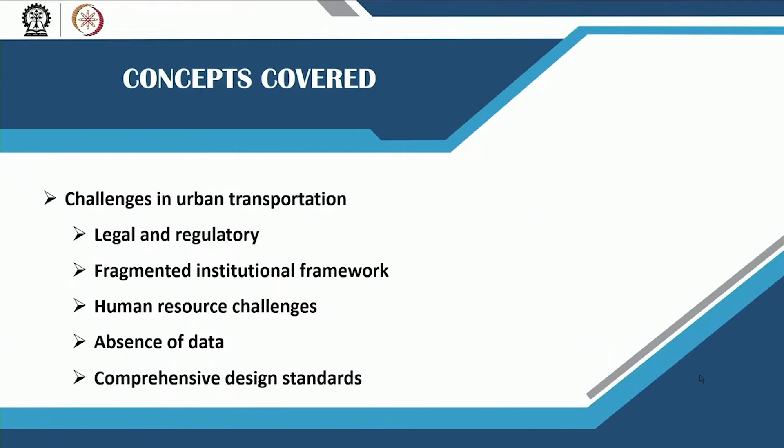So far we have introduced you to urban transportation networks, the urbanization in general, how vehicles have increased, how motorization rates have increased, and we have looked at certain specific issues in urban transport. In this lecture, we will continue looking at some challenges in the urban transportation system: legal and regulatory challenges, different institutional frameworks within which urban transport has to operate, the labor force or human resource challenges in public transportation, the lack of integrated data in urban transportation systems, and also comprehensive design standards or the lack of it.

When we look at the regulatory structure of urban transportation systems, we see that there is no central legislation that comprehensively addresses the urban transport requirements of Indian cities. There are multiple different legislations that govern different types of transportation systems, but there is not one that comprehensively stitches everything together into one coherent document. Often a transportation system operates along a road or corridor which crosses several jurisdictional boundaries, so you are left to deal with different types of regulations across different boundaries, making it even more difficult to comply with them.

For example, if a national highway crosses two state boundaries, there may be less stringent regulations in one state, while the truck entering the next state faces more stringent regulations. So the truck operator has to keep in mind these various regulations while transporting different goods. This is some of the regulatory challenges that a transportation system poses to various companies.

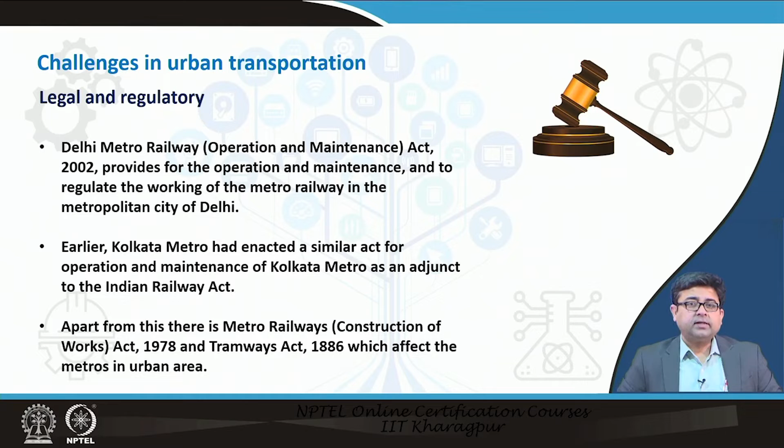But these are again only laws that govern metro rail. The laws that govern the construction of roads or highways are different. So when dealing with construction of a metro railway, you have to comply with the local regulations of highways or roads in that city, whereas operations and maintenance can be carried out as per this act. You see the multiplicity of not only the acts, but the jurisdictions and different players involved in managing these transportation systems, which makes this a very complex phenomenon.

The requirements of other modes of mass rapid transit such as BRT, LRT, monorails do not have any legislation to support them. Currently, if you were to implement a monorail - I believe in India only Mumbai has the monorail system - there are no specific regulations in place that govern its operations or construction. These are all special cases of implementation of these modes, and if you implement it in a different city, you would create a special case there as well. So there is a need for umbrella legislation so that many of these things can be coordinated well.

But when it comes to transportation and other aspects such as land use or environment, that becomes a whole other issue. If transportation impacts the environment, should the transportation agency comply only with transportation-related regulations, or do they also have to comply with overall environmental regulations, only a part of which deals with transport? So you see, when transport is such an infrastructure system that cuts across different geographies, different disciplines, and different administrative jurisdictions, framing regulations for this is a challenge which has to be overcome over the years.

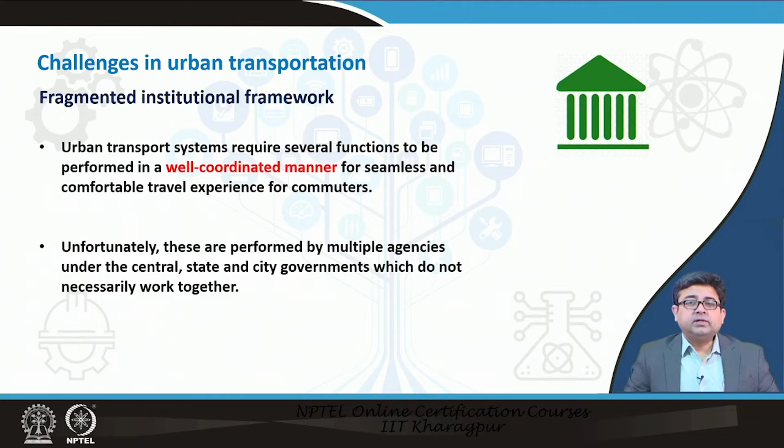The other thing is fragmented institutional framework. There are always multiple agencies at different levels that frame these laws or have jurisdiction over transport agencies. For example, transport is usually considered a state subject, but in certain jurisdictions it also becomes a local subject. So when there are different local laws and different state laws, it becomes difficult to comply with these, and enforcement also becomes difficult. There is a need to develop these legislations in a well coordinated manner.

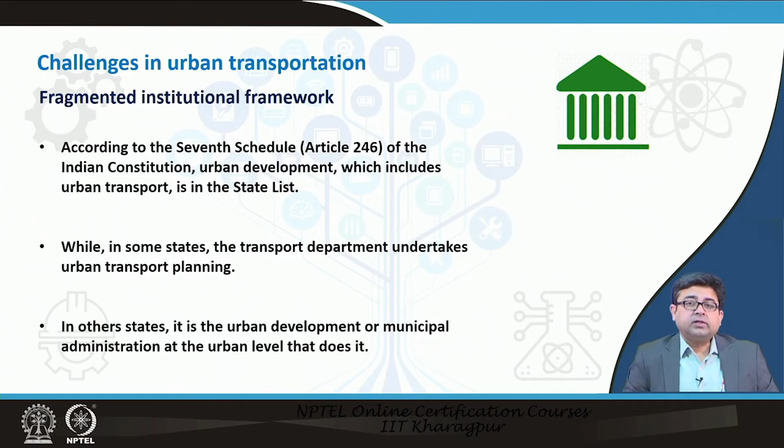According to the 7th schedule of the Indian Constitution, urban development, which includes urban transport, is on the state list. In some states, the transportation department undertakes urban transportation planning, while in other states, urban development or municipal administration at the urban level does it. So when a municipality is implementing something and a state is implementing the same thing in other cases, it becomes a challenge to oversee these things and to implement consistent regulation throughout the system. That is one of the challenges.

Also, there is an absence of any effective coordinating agency where urban transport and land use can be integrated. This is always a challenge, not only in India, but also worldwide. Land use and urban transportation go hand in hand. So when we say that, what we mean is that if the use on any particular piece of land changes, its impact on the transportation network also changes.

For example, if you have land on which you currently have a single story independent house, the number of trips or vehicles generated from that house is significantly different from if you convert that land into something where you build a multi-storied apartment complex. Both are residential, so you are not changing any zoning, but you are changing the land use, and with this change, the apartment complex may have multiple families living in it, each with multiple vehicles. So the number of vehicles coming out of the same parcel of land will change, and that will differently impact the transportation network. This is what we mean when we say there is a strong relationship between land use and transportation.

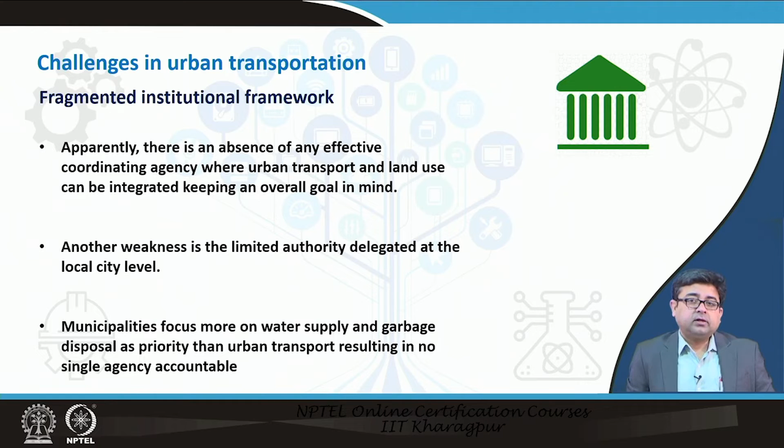Now, when we talk about the institutional framework, land use may not be governed by any transportation legislation, laws, or regulations, and so there is always a miscommunication between these two agencies as to how to well coordinate between the two. Only a few urban areas around the world have come around to solving this problem, and most of us are otherwise grappling with this issue.

Next comes the human resource challenge. Transportation as a field for employment has always been there. Many people are employed, especially when a new highway, new railroad, or new airport is built. So it does generate a lot of employment, but what happens is these are one-time jobs. You cannot use the same labor force who built a particular airport in one city to then take it all the way across the country to build another airport in a different state or city. You usually don't do it. So what happens is the skill set that local people develop can only be used once or twice.

Highways are a more popular source of generating income or livelihood, because you may expand the highway and your local knowledge always helps you generate a lot of jobs.

But when it comes to urban transportation, other than the construction of highways or structures related to the transport network, other human resources are in a very nascent stage of development currently. For example, how do you build an efficient metro rail system?

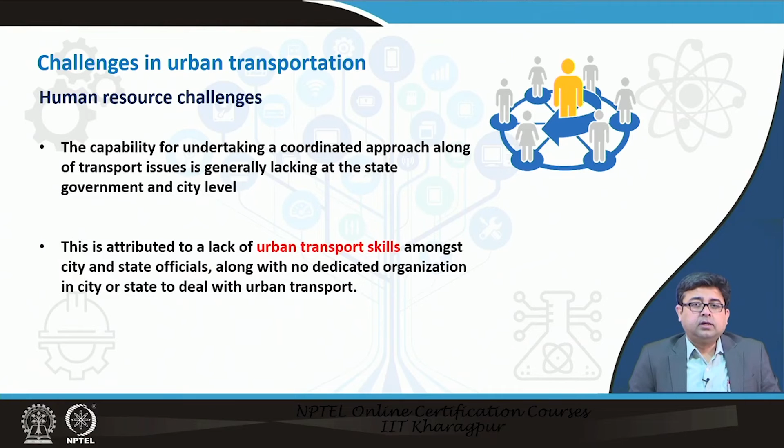Most of the state and city level agencies have suffered from overstaffing of untrained, unskilled manpower. So when you look at some of the older institutions in transportation, such as the Public Works Department and so on, you would see that they employ a large number of people.

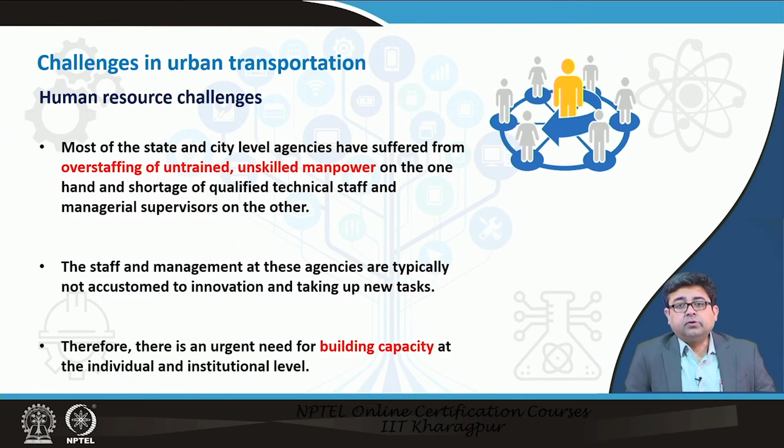However, their skills have not been redeveloped or polished over the years. So they are still using older technologies, not keeping pace with the new technologies that are available, which in turn affects the quality of work being conducted. So that kind of lag, or lack of skill development and reskilling, can be noticed in some of these older agencies.

The next challenge in the transportation sector is data. What you can infer is that there is data available, but it is in silos, and it is not available very easily in digitized format, especially in the case of India. So although the slide says absence of data, you are to interpret that as absence of coordinated, easily available digitized data.

If I were to want to access the data of a different city, it would be very difficult for me, sitting in another city, to access that data easily via the internet or something else. Of course, the data would be made available to me if I went through the proper channel, wrote certain application letters, and moved certain files, and I am sure we would obtain the data within a month or so, but there is a lag in getting that data.

Then the quality of data is the next thing. If it takes a lot of time just to get hold of the data, you have to make sure whether you are receiving the right type of data, and what is the quality of that data. Is there a lot of noise within the data? Is the data clean? Are the parameters you are looking for available in that data? Is the data very recent, or is it very old? All of these issues are there with transportation related work.

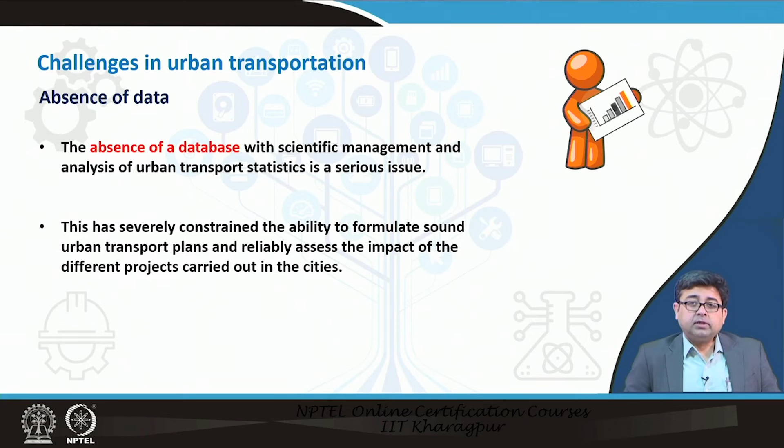However, with the advent of big data sources, there are newer regulations being formed which are enabling different agencies to get real time data and use it for effective governance, so that the operations of urban transportation systems improve. So overall, you could say that there is data that is available, but what lacks is the timely availability of quality data that is digitized and coordinated.

Like we said, reliability and accuracy of the data has a lot to be improved upon, along with availability of data from one agency to the other. So one agency might be doing a great job keeping up with all its data elements, but the adjoining agency or administrative unit may not have any data.

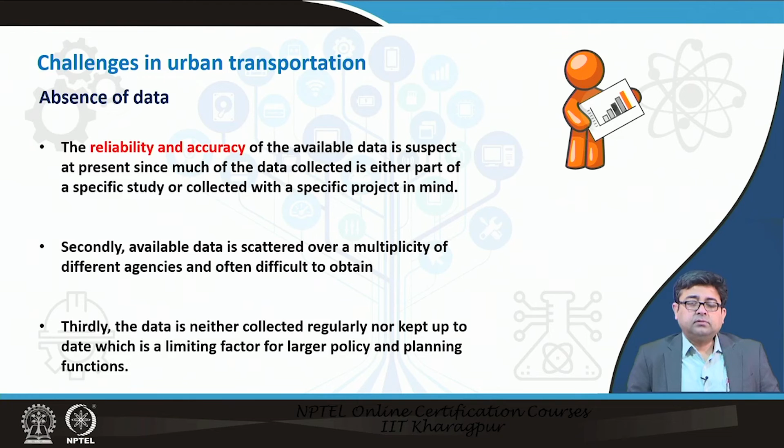So when you are looking for data at a corridor level or a regional level, you would only have data for certain segments maybe, and not for the entire segment. That does not help much in understanding or developing efficient policies for improving the operations of the transportation system.

The National Urban Transport Policy, formed in 2006, identified the Institute of Urban Transport India to be developed as a national institute to build a database repository. So there are steps being taken. Now you have a digital database where many agencies are putting up their data, and it is easily downloadable. These efforts are helping researchers and analysts to data crunch, number crunch, and bring out solutions to these problems.

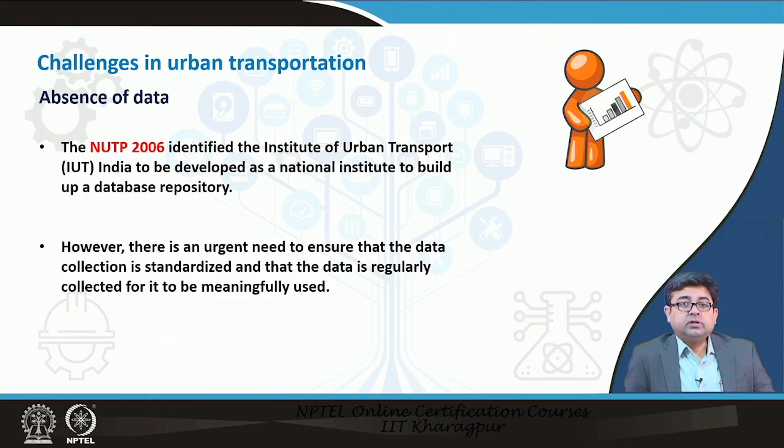You should also be aware of certain data uses being thought of in India, such as urban observatories, which are implemented at a city level scale. Some cities, for example, have cameras at all their intersections. These cameras generate huge amounts of data, and there is a central control room where people are monitoring all intersections and crunching this data to understand real time traffic conditions. They can predict that if an accident has happened downstream, what its impact will be on the upstream traffic. So if you have continuous real time data coming from live camera feeds, you can always convert that into real time information. The data needs are always growing.

Lastly, there is a challenge when it comes to comprehensive design standards. IRC codes are available for different types of design, setting out design guidelines and technical standards for construction of roads and bridges. However, a critical feature is that IRC codes are not adhered to for urban road development. They are not mandatory for municipalities. So you have these regulations, these codes, but they are not made mandatory.

When they are not made mandatory, people usually bypass the standards in the name of cost saving, and often construct substandard roads or substandard bridges or structures, which is never desirable. IRC has been developed over the years and has nearly been perfected in many cases for the design of roads and bridges.

However, new age transportation systems such as metro rails, BRTs, or bicycle paths and tracks do not have design standards. So you would question why a system is not working. We have to remember that due to the lack of standardized designs, the system may have been bound to fail. Are we developing systems just by looking at international standards and trying to build them here? Many times such systems may not work if they do not have indigenous standards catering to local conditions. So there is a need to develop comprehensive design standards for new age transportation systems, and also a need to implement such standards or make them enforceable so that local municipalities or states follow them.

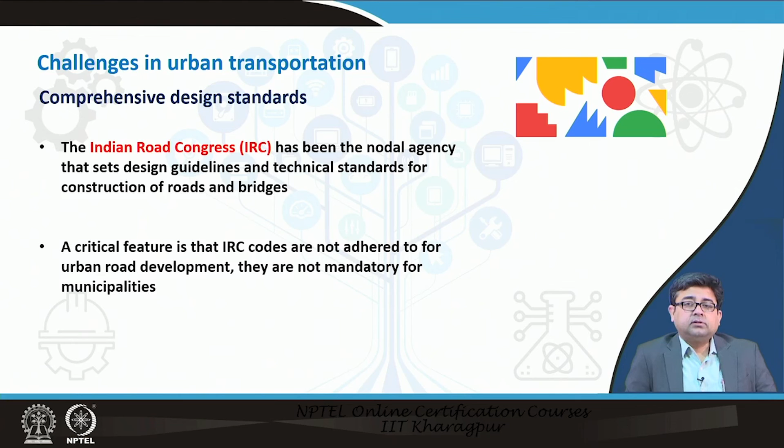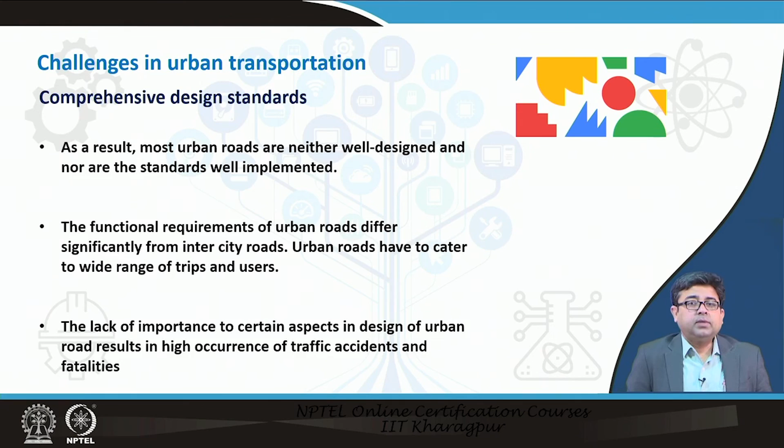This is what we already discussed: urban roads are not mandated to follow IRC, and hence many times substandard roads are built. In the absence of urban road standards, some city-led initiatives have been taken up, notably in Delhi and Bengaluru. For example, along urban roads there are no design standards that take into consideration the street vendors on footpaths. It is very easy to say we should remove all street vendors from footpaths, but for these vendors, that spot along the footpath is where they earn their livelihood. So it is a tough call to say you take your livelihood somewhere else.

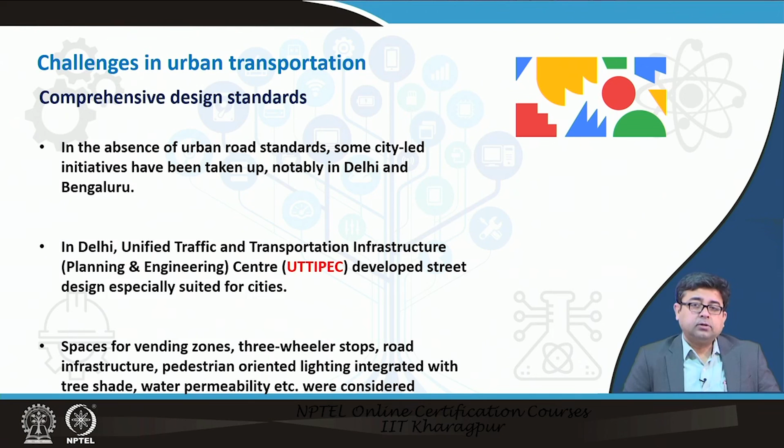A way to deal with it is to have sidewalk design standards that provide spaces to these vendors, so they can earn their livelihood, while pedestrians also do not have issues walking along the sidewalk. Such integrated, coordinated design standards are needed to meet today's real challenges in our cities, rather than following design standards from foreign nations or older standards that don't apply in the current day and age. It is always good to have cognizance of international design standards, but implementing them blindly is not always recommended. You have to take into cognizance the local or Indian conditions before you implement them.

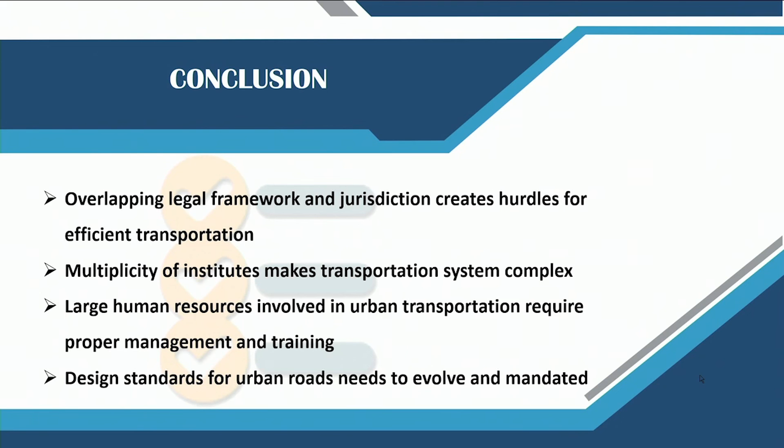In conclusion, today we looked at the second set of challenges faced by urban transportation systems. We looked at the different legal and jurisdictional hurdles, and how there is a multiplicity of institutions that have to be complied with while developing these transportation systems. We looked at the issue of labor or human resources in urban transportation, and how they have to be skilled from time to time to keep up with new technologies. Finally, we looked at the need for various coordinated design standards that address the existing Indian urban situation. Thank you for your attention.